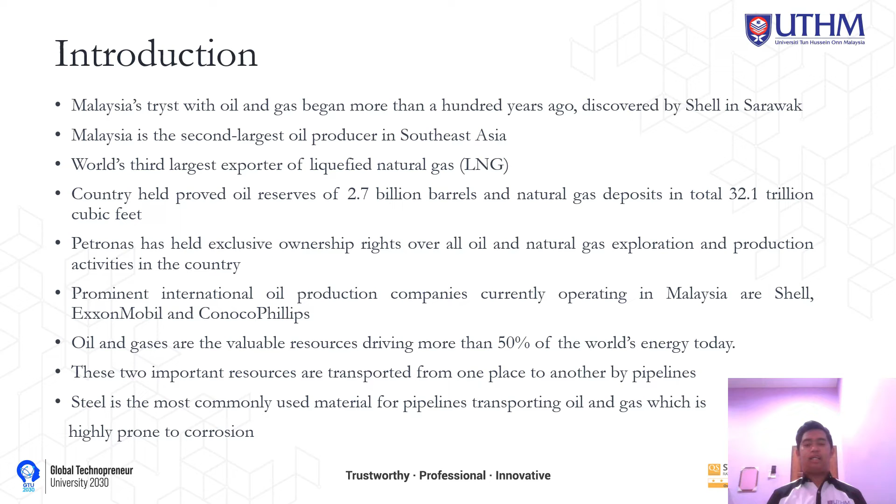Next, in general, the development of oil and gas activities below the surface of the sea can be summarized into three stages: exploration, development and production. First is exploration, the search for the location of the oil-bearing strata below sea level. Next is development, which is designing, construction, transportation, assembly and testing of facilities for hydrocarbon extraction from below sea level. The last one is production, which is digging, processing and transporting hydrocarbons from below the sea surface to land for further processing.

Next, the goals for oil and gas. The first one is to secure more control over the country's petroleum resources. Next, provide the commodity at affordable prices in the local market to boost the growth of capital and energy intensive activities. And the last one is to foster upstream and downstream linkages as well as the participation of local operators in the sector.

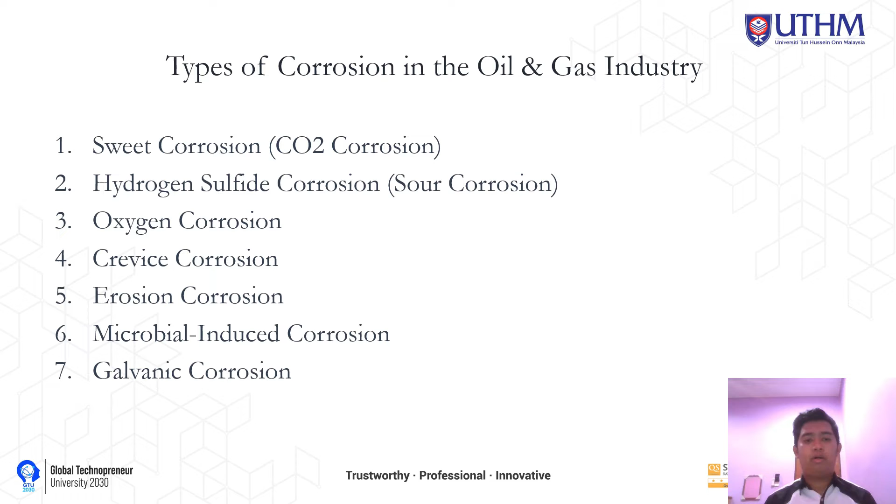These are the types of corrosion in the oil and gas industry. The first one is sweet corrosion or carbon dioxide corrosion. Number 2 is hydrogen sulfide corrosion or sour corrosion. Number 3 is oxygen corrosion. The next one is crevice corrosion. Number 5 is erosion corrosion. Number 6 is microbial induced corrosion. And the last one is galvanic corrosion. Among all these types, I will focus more on galvanic corrosion because it is the main corrosion that we chose for the case study.

Next, this is the factor of galvanic corrosion in the oil and gas industry. Galvanic corrosion happens when two metallic materials with different electrochemical potentials come into contact and are subjected to an electrolytic environment. In such a case, the metal with a higher potential for corroding acts as an anode. The most noticeable sort of galvanic corrosion takes place when CRAs, such as stainless steel or nickel alloys, are coupled with carbon or low alloy steels in an anaerobic environment.

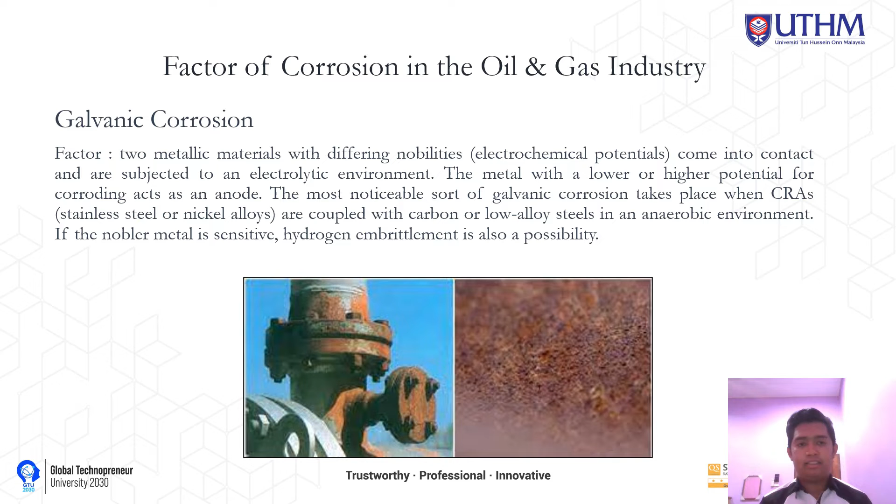If the nobler metal is sensitive, hydrogen embrittlement is also a possibility. Galvanic corrosion is facilitated by the presence of hydrogen sulfide and low temperatures. As we can see in the figure on this slide, this is the galvanic corrosion that occurs in a pipeline in the oil and gas industry.

Okay, Assalamualaikum. Now I will explain ultrasonic testing, which is used to detect corrosion. Ultrasonic testing relies on the generation and detection of mechanical waves or vibrations within the sample being inspected. It is a type of testing that uses waves to detect defects or flaws in a material without destroying the part.

And oscilloscope display. So the oscilloscope is the one that the inspectors are looking at. Now at the oscilloscope, the defect will be shown in the form of a graph. So the transducer is moved around the inspected object or the inspected surface, which is commonly attached to the test sample by a gel, oil or water. The gel helps the probe to move smoothly around the surface of the material being inspected.

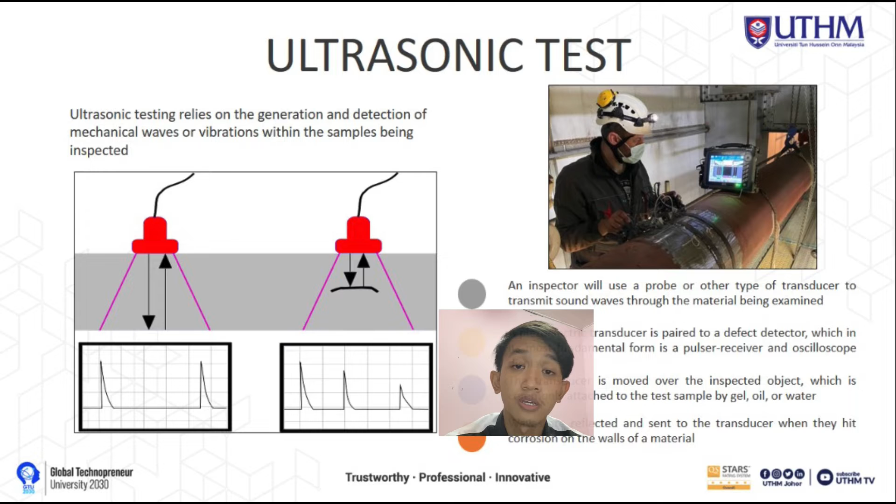Okay, the waves are then reflected and sent to the transducer when they hit a corrosion or a defect in the wall of the material. So as we can see on the schematic figures beside, we can see the probe, which is the one in red color, producing a wave. Then when it goes through a defect, the graph will be shorter. As we can see in the picture at the left side, the graph is parallel. Then when it finds a defect, the graph will be shorter.

Okay, now we are going to salt spray testing. Salt spray testing is the common type of testing used for corrosion detection. It is used because salt spray testing is a low cost, well standardized and reasonably repeatable procedure. The purpose of salt spray testing is to assess how corrosion will damage a specimen. This testing allows us to examine the differing levels of corrosion resistance exhibited by various metals and surfaces. Typically, salt spray testing is conducted in line with ASTM B117.

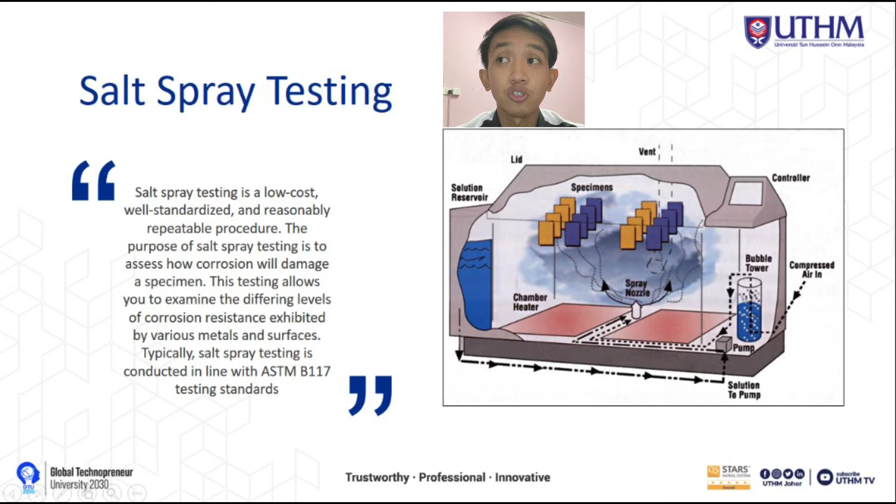Okay, next we are going to the salt spray procedure. First of all, the most important thing, we need to clean the surface of the material being inspected. Then the samples are placed in the chamber according to the standard, and the test chamber's temperature is set based on the test standard. Then make sure no sample is hiding another sample, which can cause droplets from one sample to fall on another sample. Then we need to insert clean empty salt spray collection vessels around the samples inside the chamber, preferably at the height of the sample and never below the sample, because it can sink into them from above.

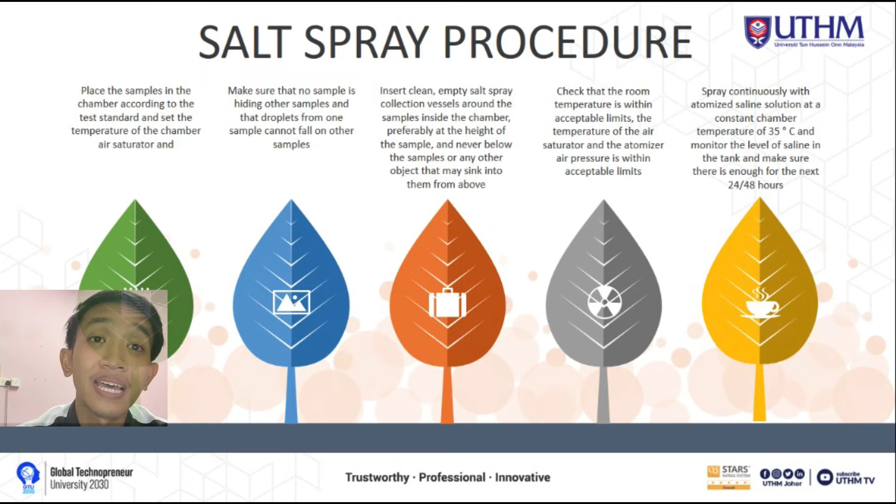Next we need to check that the room temperature, the temperature of the air saturator and the atomizer air pressure are within the acceptable limits. Next we need to ensure the spray runs continuously with atomized saline solution at a constant chamber temperature of 35 degrees Celsius, and monitor the level of saline in the tank to make sure there is enough for the next 24/48 hours or the period used to inspect the material. Then after finishing the salt spray procedure in the chamber, we can take a picture, then inspect the type of corrosion that happened on the material.

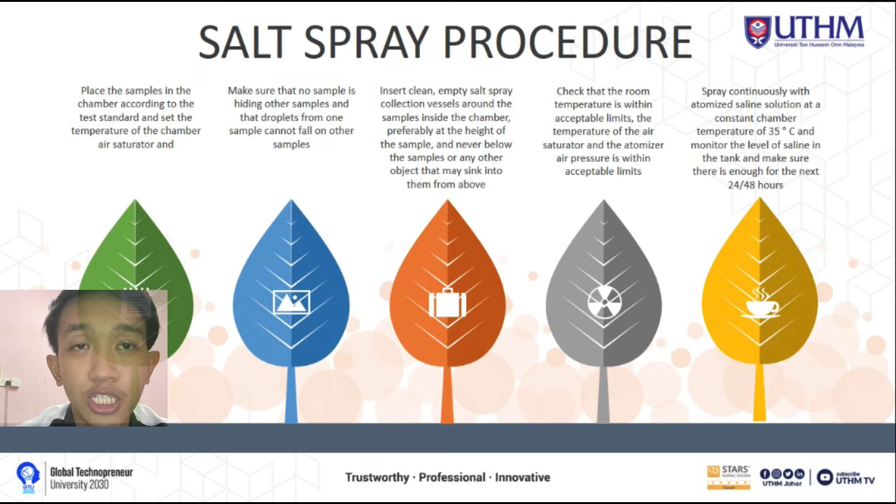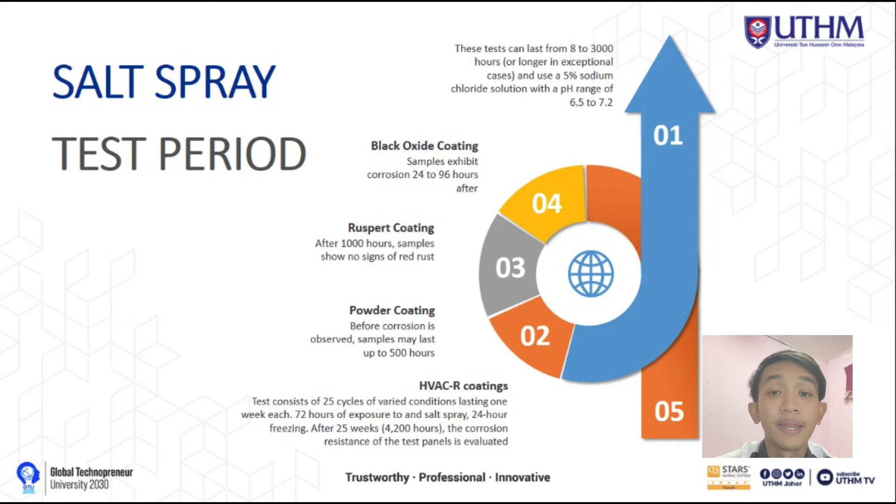Then for the HVACR coating, which is used in the marine industry, in the sea environment, the test consists of 25 cycles of varied conditions lasting 1 week each, which is 72 hours of exposure to the sun, then 72 hours of exposure to salt spray, then 24 hours of freezing, and after 25 weeks, which is 4,200 hours, the corrosion resistance of the test panel is evaluated. So that's all for the salt spray test.

So I want to present a type of corrosion, galvanic corrosion, with a label. First, galvanic corrosion can sometimes occur under severe environmental conditions in aluminium alloy, triggered when it comes into contact with a steel fastener. When two dissimilar metals, like electrodes with a potential difference between them, come into contact with one another in an electrolytic environment, galvanic corrosion will occur.

Next, galvanic corrosion is an electrochemical deterioration of metal. Galvanic corrosion has three conditions that must be satisfied by the metals involved before it can take place. First, they must be in electrical contact, so ions can be transferred to each other. Next, they must be located in an electrolytic environment.

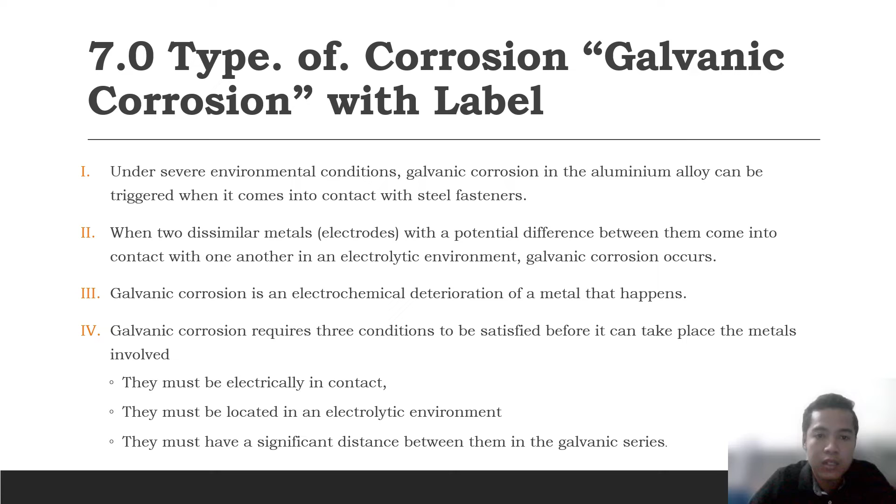So they must satisfy the environment for the electrolyte. And then the last one is they must have a significant distance between them in the galvanic series. So there must be a certain gap between the two metals for galvanic corrosion.

So like you can see in the picture, there is a sample of galvanic corrosion. If you can see, there is no gap between the two metals. There is an aluminium alloy plate, and then the nut is a stainless steel fastener. So this type of corrosion satisfies three of the main points for galvanic corrosion to occur.

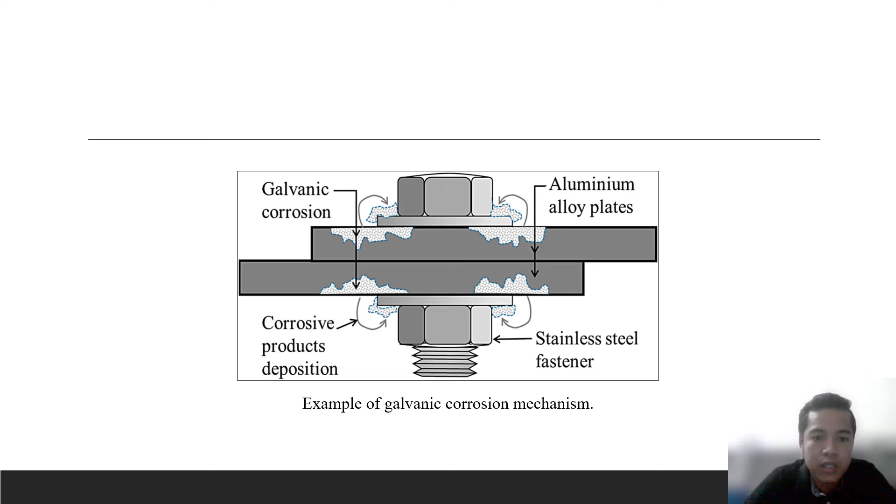So if you can see, there is corrosion product deposition under the plate between the nut and the aluminium alloy plate. So this can be galvanic corrosion of the aluminium alloy plate. Okay, next is the character of corrosion. So character of corrosion has three types that I can present for you.

Firstly is the effect of solution. So the amount of galvanic corrosion that occurs is also dependent on the composition of the solution. Although galvanic action protects the steel in all solutions, the amount of zinc corrosion that occurs is dependent on the specific composition of the solution. So this means two types of metal must have specific compositions. So when there is a different composition, galvanic corrosion will occur.

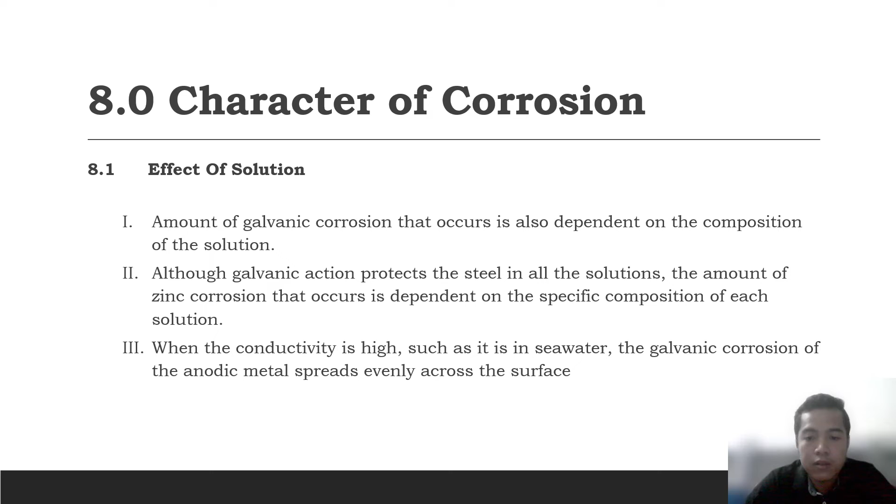And then when the conductivity is high, such as seawater, galvanic corrosion of the anodic metal spreads evenly across the surface. So when seawater contacts the metal, the ionic action for corrosion will occur so fast because seawater has sodium chloride. So that will make the galvanic corrosion faster.

Okay, if you can see, this is the effect of solution conductivity on the distribution of galvanic corrosion. Picture A is low conductivity and B is high conductivity. You can see the original surface and after corrosion in tap water. So low conductivity will expand to the surface. And then for picture B, high conductivity, you can see the original surface and after corrosion in seawater.

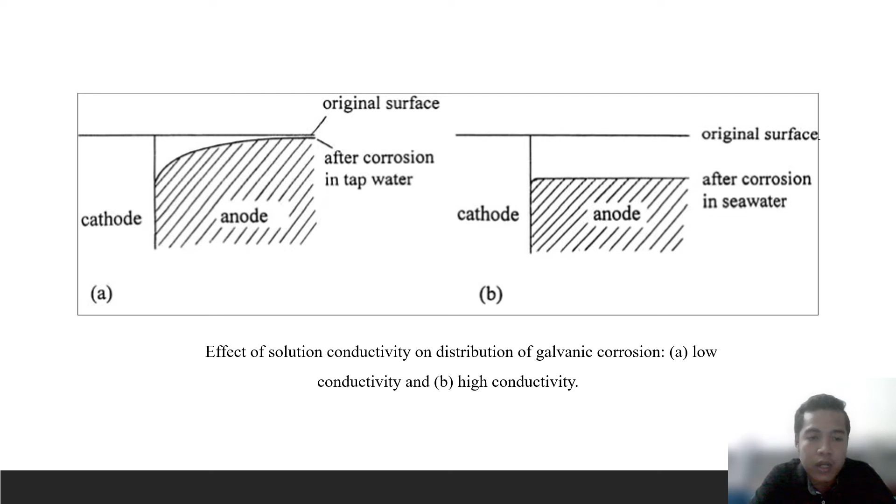If you can see, there is corrosion for the metal that occurs so fast. So in picture A, the corrosion will expand to the outside of the original surface.

Okay, next is atmospheric environment. So when different combinations of materials are used in construction, buildings or structures that are exposed to the atmosphere, this mostly happens because the air that we use also has water, H2O. So this combination of elements will make the metal more prone to corrosion because water has ionic combinations that make the metals react with each other.

And then the measurement of weight loss in metal is also most commonly used when assessing galvanic corrosion in atmospheric environments. So this statement means when metal has a specific weight, over a certain time or a long time, there must be quality control for the difference in weight loss.

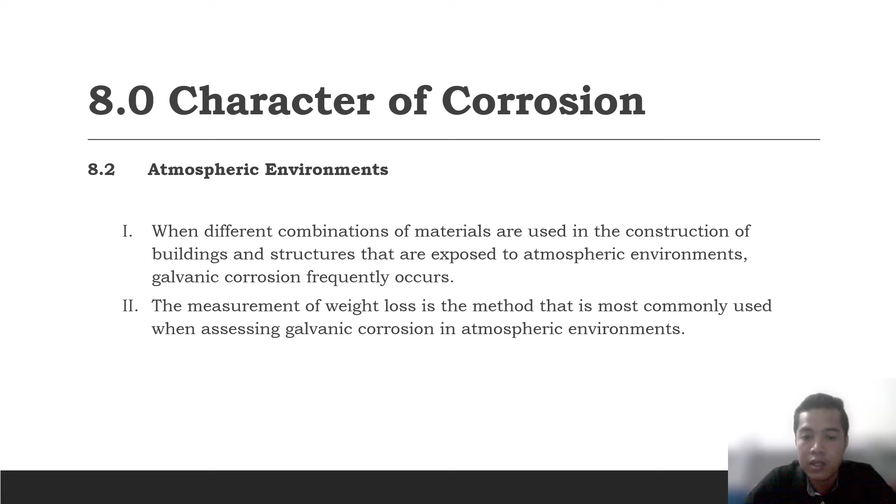So let's say we have 80 grams of the metal, and then in the next 2 years we will check again and see how much weight was lost from the original weight that we used. So maybe it can lose 5 grams or maybe 10 grams. Maybe the last weight that we get is 70 grams of the metal that is not corroded yet.

Okay, the last one is natural water. So like I said in 8.2, our atmospheric environment has gas. The air that we use has H2O, water vapor. So this natural water is in certain conditions like seawater and fresh water. So sometimes this type of natural water has conductivity.

So in seawater, because of the salt, the conductivity is much higher than fresh water, because typically fresh water has lower conductivity for reacting with the metal to make corrosion. So the corrosion of anodic metals such as zinc or steel increased by a factor of 5 to 12 in seawater, and in fresh water only by a factor of 2 to 5. So we can see the conductivity in seawater is higher than fresh water. And then next, a factor of 6 to 7 times more corrosion was observed.

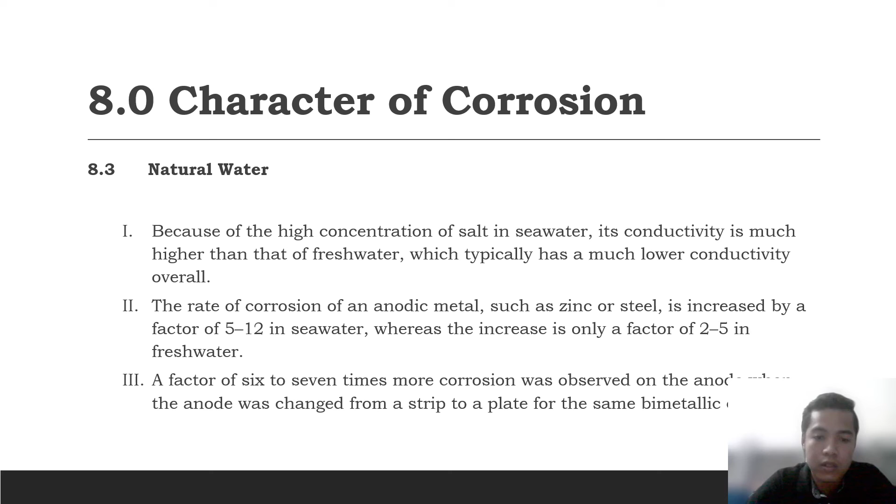So in this part I will explain 6 ways to avoid galvanic corrosion. First is insulation. Second is electrode isolation, selection of appropriate contacting metal, corrosion inhibitor, minimize the area ratio, and the last one is initial physical contact.

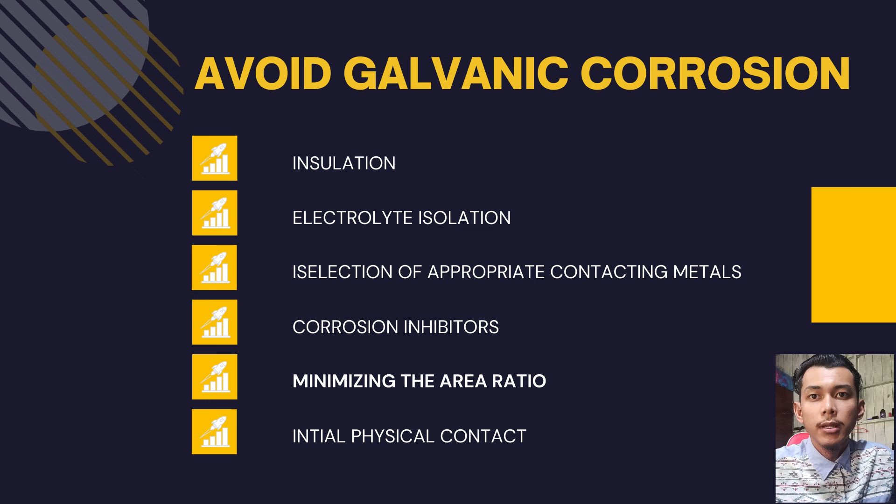First is insulation. Placing a non-conducting material between the contact points of the coupling metal is one of the most effective techniques of breaking the electric channel in the electrochemical cell. Galvanic corrosion occurs when electrons travel from the anode to the cathode, resulting in the galvanic current in the system. Insulation material prevents electron flow, hence inhibiting oxidation and reduction reactions. So in practice, insulation is typically achieved by using polymer and elastomer based bushings, washers, gaskets, and coatings. For example, you can see the figure.

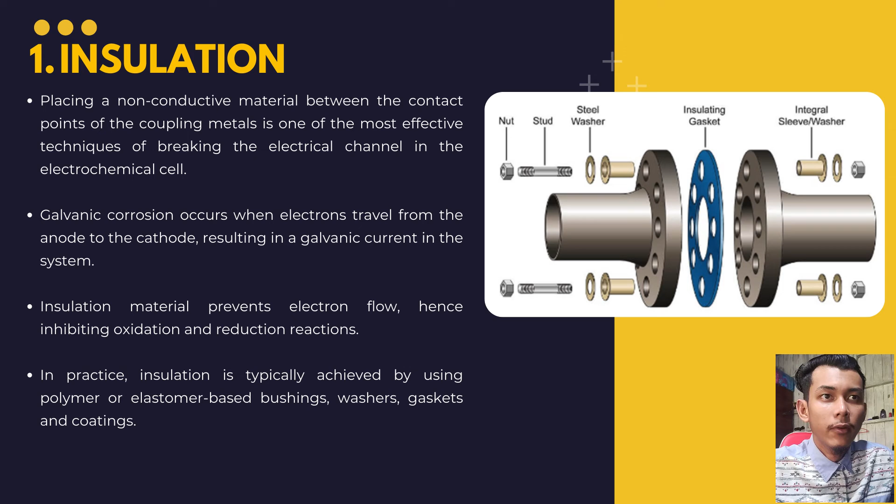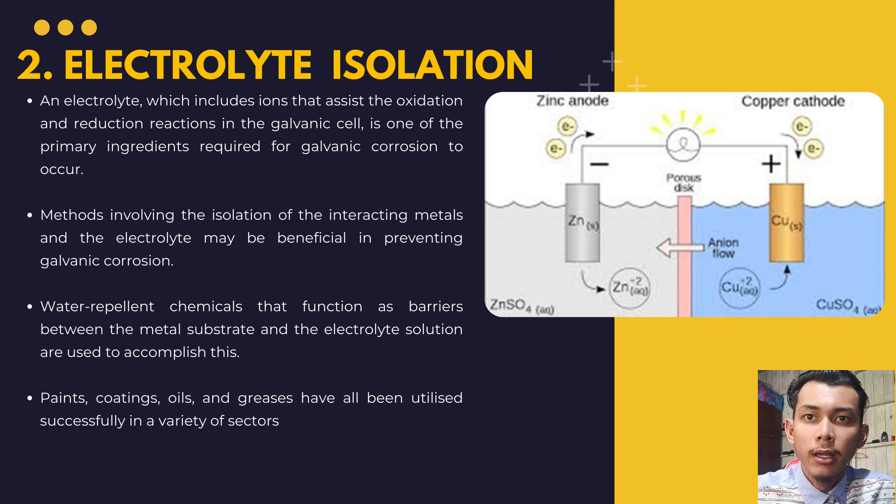Okay, second is electrolyte isolation. An electrolyte, which includes ions that assist the oxidation and reduction reaction in a galvanic cell, is one of the primary ingredients required for galvanic corrosion to occur. Methods involving the isolation of the interacting metal and the electrolyte may be beneficial in preventing galvanic corrosion. So water-repellent chemicals that function as a barrier between the metal substrate and the electrolyte solution are used to accomplish this. So paint, coating, oil and grease have all been utilized in a variety of sectors.

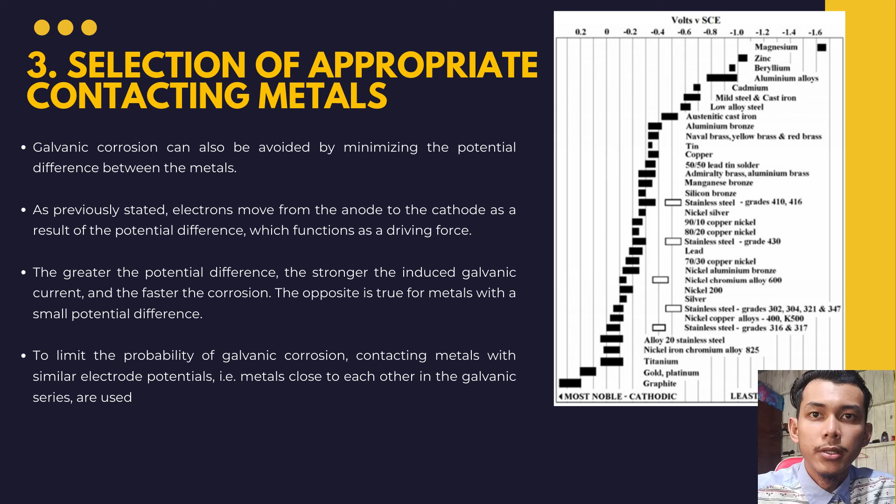Third is selection of appropriate contacting metal. Galvanic corrosion can also be avoided by minimizing the potential difference between the metals. As previously stated, electrons move from the anode to the cathode as a result of the potential difference, which functions as a driving force. The greater the potential difference, the stronger the induced galvanic current and the faster the corrosion. The opposite is true for metals with a small potential difference.

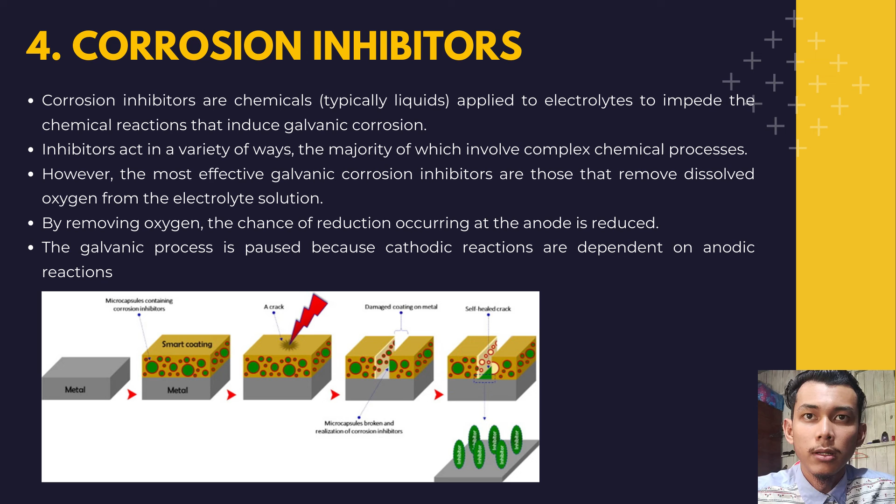Corrosion inhibitors are chemicals, typically liquids, applied to the electrolyte to impede the chemical reactions that induce galvanic corrosion. Inhibitors act in a variety of ways, the majority of which involve complex chemical processes. However, the most effective galvanic corrosion inhibitors are those that remove dissolved oxygen from the electrolyte solution. By removing oxygen, the chance of reduction occurring at the cathode is reduced. So the galvanic process is paused because the cathode reaction depends on the anode reaction.

Next is minimize the area ratio. Several studies have found that the cathode to anode area ratio influences the pace and severity of galvanic corrosion. The greater the cathode area in respect to the anode, that is, the greater the cathode to anode ratio, the faster the oxidation at the anode, and hence the more severe the subsequent galvanic corrosion. The smaller the cathode to anode area, on the other hand, the less damaging the resulting degradation. So it is wise to ensure the region of the more anodic metal is as large as feasible in respect to the cathode during the primary design stage. So steel fasteners in an aluminium plate, for example, will outperform aluminium fasteners in a steel plate.

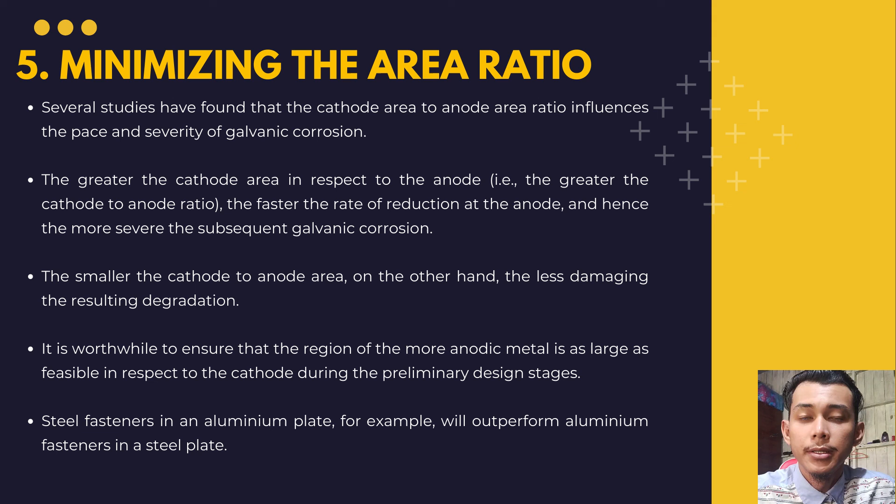So the last one is initial physical contact. Galvanic corrosion can sometimes occur without initial physical contact. Corrosion of a metal may result in a water soluble corrosion product, which can deposit on the surface of another metal. So a good way to prevent incidents like this from occurring is to ensure that the right materials are used. Also keep in mind the relative placement of a particular metal in a building. For example, one should ensure the gutter from a copper roof should always be copper or stainless steel, but not aluminium.

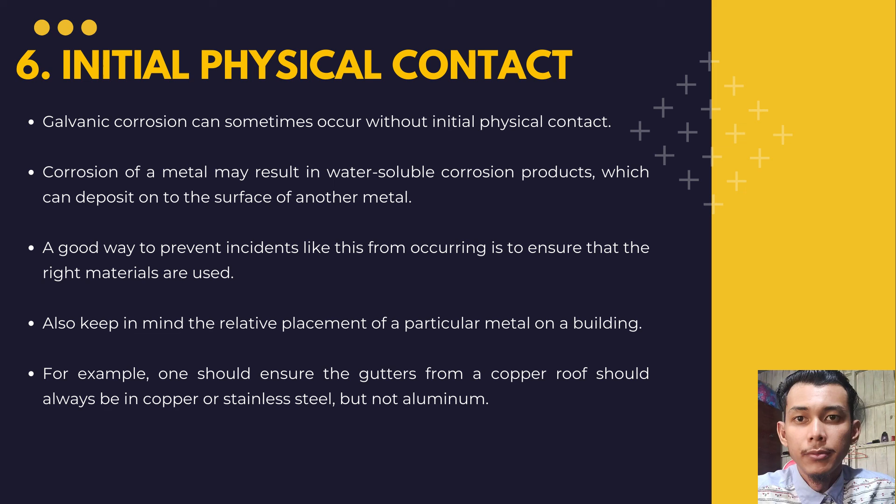So for the conclusion, galvanic corrosion, resulting from a metal contacting another conducting material in a corrosive medium, is one of the most common types of corrosion. It may be found at the junction of a water main where a copper pipe meets a steel pipe, or in microelectronic devices where different metals and semiconductors are placed together, or in metal composite materials with a reinforcing material.

So galvanic corrosion may result in quick deterioration of the metal, but in other cases, the galvanic corrosion of one metal may result in corrosion protection of an attached metal, which is the basis of cathodic protection by sacrificial anode. Understanding the mechanism involved in this electrochemical reaction is key to selecting the most appropriate and effective prevention measure for a given situation.